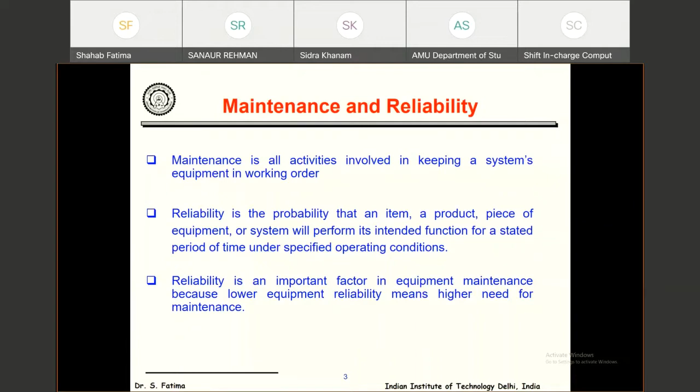because if we want to increase the reliability of any component or machinery, we have to perform some maintenance tasks, and we have to decide when to do those maintenance tasks. So by doing those things, we are able to increase the reliability of machinery and maintain it for a longer period of time. So reliability is an important parameter in equipment maintenance.

So before I proceed, I just want to discuss the basic terms used in reliability. One is failure. What is failure? Failure is basically an event when an item is not able to perform its intended function. Failure rate is the number of failures per unit of gross operating period, time, event, or cycle. And what is mean time between failure?

Because we are trying to maintain the system, and here we are talking about the reliability or availability of mechanical components, those that are repairable in nature. For that, mean time between failure is calculated. Basically, mean time between failure is the average time between failure occurrences: the number of items and their operating time divided by the total number of failures. Mean time between failure is basically for the repairable item.

Mean time to failure is actually used for repairable as well as non-repairable items. Non-repairable items means electrical and electronic components which cannot be repaired. So for those components, we calculate the mean time to failure, the average time to failure occurrence.

Next is mean time to repair. So here we calculate how much time is required to repair or restore the item to a specified condition. That is known as mean time to repair. Repairability, maintainability, availability, these are terms which are used very frequently and people basically get confused by

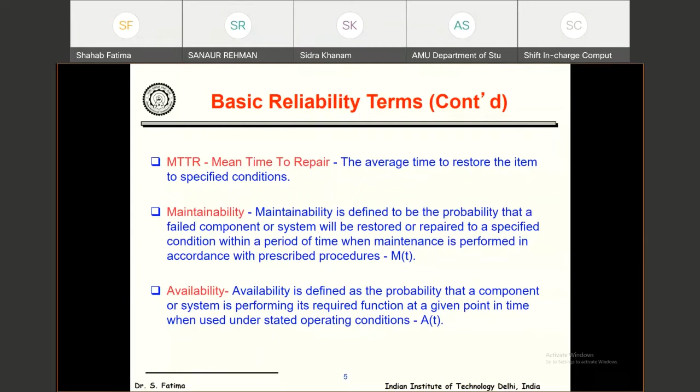Now we are discussing the types of failure. In a mechanical component, what could be the type of failure? There are two most common types. One is sudden failure, which is due to some stress that exceeds the strength of the product, equipment or machinery. The next is degradation failure, that is, gradual wear out. Degradation indicators include crack growth, change of resistance, corrosion, and aging.

In a sudden failure, we can't do anything with maintenance, because that is a sudden act of God, or there are other factors. Sometimes the current increases, or there are many other factors associated with sudden failure. So we don't have any control over sudden failure, but most components encounter degradation failure. Degradation failure is the ideal condition for any type of maintenance, including condition-based maintenance. Other failures may also occur in the system because of human error.

Reliability is basically the life-to-death phenomenon of any component. Each component has to face three different phases: burn-in phase, useful life, and wear out. The burn-in phase has a decreasing failure rate, where the possible causes of failure are manufacturing defects, welding, soldering, assembly defects, errors in the part, or poor workmanship.

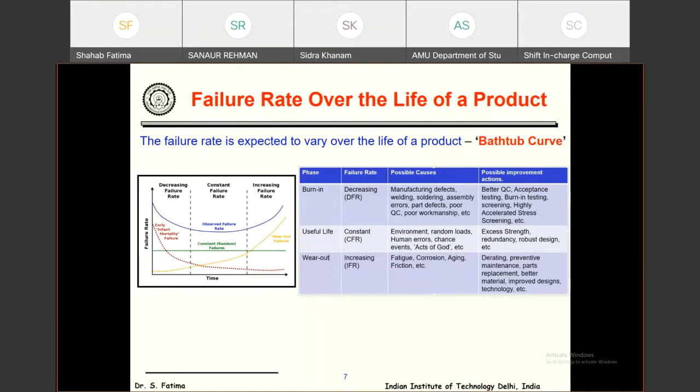If you look at the bathtub curve, the failure rate of mechanical systems starts increasing from the beginning, whereas it is constant in electrical and electronic systems. So, degradation, failure, and maintenance. What is machine availability? Machine availability is basically uptime divided by total time, that is, uptime plus downtime.

So now, what is the major problem? What we are facing in the useful life is unexpected breakdown. If we talk about any plant, or any machinery or any product having a mechanical component, we are facing unexpected breakdown.

So here, if you have a plant like this, a sewage treatment plant, there are so many units: it has a preliminary treatment plant, primary treatment, membrane, end product. So this is a total plant. And if you talk about a big machinery, you can look into the surface miner. There we can see there are a number of components.

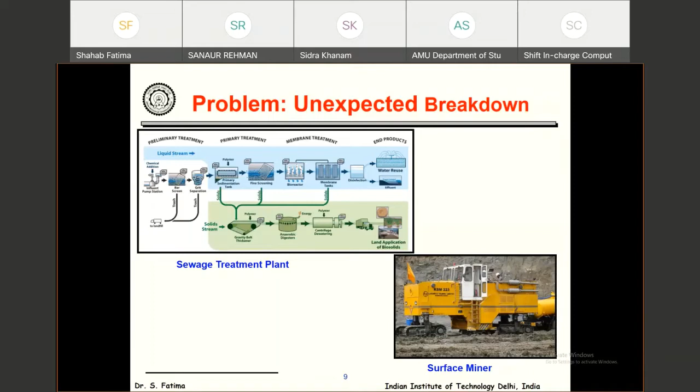So if we face any kind of unexpected breakdown, how to maintain that system? Or is there any other way to figure out the maintenance before it actually happens? So here, the major problem is unexpected breakdown. So by doing the maintenance, how can we reduce the effect of the breakdown, or how can we minimize the effect of breakdown?

Looking into the definition of maintenance, maintenance is basically the combination of all technical and administrative actions, including supervision actions, intended to retain an item or restore it to a state at which it can perform a required function. This is the standard definition of maintenance. Maintenance is basically a set of organized activities that are carried out in order to keep an item in its best operational condition with minimum cost.

See, every time we talk about maintenance, we will also look into the cost of maintenance. The cost of maintenance cannot exceed the cost of the product. So every time we have to look into the cost of maintenance also.

If you look into the history of maintenance, maintenance started in the 1940s, or you can say the first generation of maintenance. At that time, once the system fails, we try to fix it when it broke, a run-to-failure kind of strategy, or you can say breakdown maintenance is what people were doing.

In the second generation of maintenance, people were trying to schedule the maintenance activity, or schedule the monitoring of the system, or you can say scheduling the overhaul, or doing some cycle-based activities for maintenance. So here people are performing preventive maintenance.

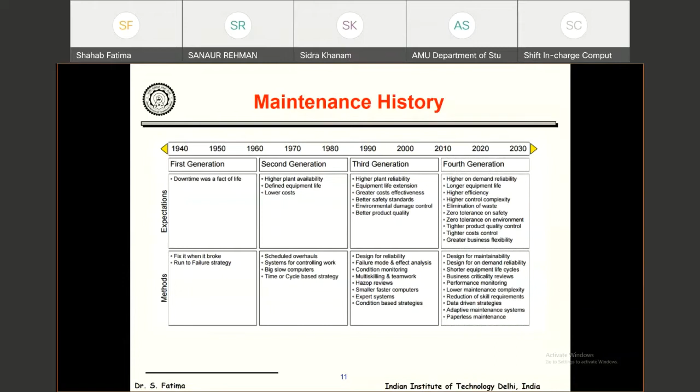So what are the basic objectives? We all know the basic objectives are maximizing production, minimizing energy usage, optimizing the useful life, looking into the budget, optimizing the maintenance activity, optimizing resource utilization. And by doing those, what we achieve is reduced breakdown, reduced downtime, improved equipment efficiency, improved inventory control, and cost reduction. So we are all aware of the maintenance objectives.

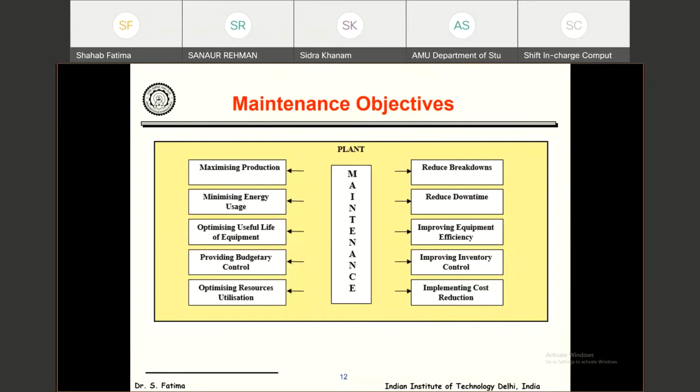Now, as I told you, we have four different types of maintenance philosophies. One is breakdown maintenance, also known as reactive maintenance. We wait for the system to fail. Once the system fails, we fix it. Next is preventive maintenance, known as periodic maintenance because it is based on some period of time, schedule, calendar, runtime or number of events. So that is known as preventive maintenance.

The third one is predictive maintenance, that is, condition-based maintenance. By mounting some sensors on the machine, we are trying to predict the condition of the machinery. The fourth one is proactive maintenance. This is the fourth generation, where we are trying to identify and design out the root causes of failure.

So I'm going to discuss one by one in detail. Breakdown maintenance implies that repairs are made after the equipment has failed and cannot perform its normal function anymore. Nowadays people also use breakdown maintenance because it is quite justified in small scale industry where the systems are not critical.

So systems are basically divided into 3 categories. One is the critical component, without which things will not perform. Next is essential. Essential is also very important, but here we can perform the actual production without it. The third one is general purpose equipment. For general purpose things, breakdown maintenance is quite justified. For essential equipment, we are looking for preventive maintenance as well as breakdown maintenance.

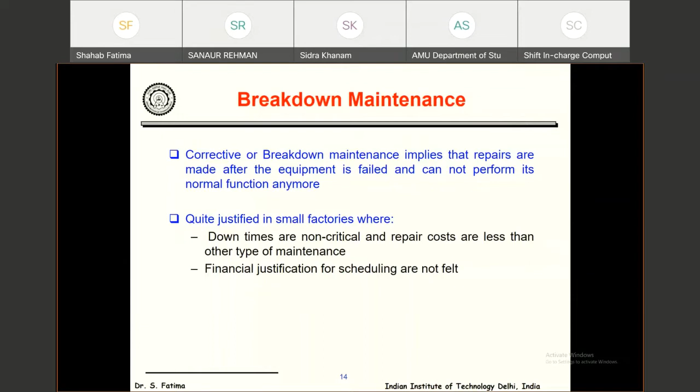So next is preventive maintenance. It is a set of activities that are performed on plant equipment, machinery, and systems before the occurrence of failure in order to protect them and prevent or eliminate any degradation in operating condition. So it is good for machines and facilities whose failure would cause serious production loss, because preventive maintenance is also associated with cost. Every time you are performing some task to maintain the system.

If you talk about an automobile, every 6 months or a number of kilometers, you have to perform your preventive maintenance. You have to change the filter, you have to change the oil. Sometimes it is quite justified, but sometimes your oil condition is good, and still, because the OEM has told you to change your oil after a certain period of time, you are changing your oil without looking into the oil condition. So in that case, you are actually wasting money, correct? Your oil is as good as it was, but you are changing it because as per your OEM you have to change it after 6 months. So that is counted as a loss in maintenance.

So it is good for those machines. But if you talk about defense or army activities where you have to use a missile or a tank, in that kind of machinery the critical thing is the person who is going to operate it. During war, you are not looking at the money side, you are looking at the working of the equipment. Or if we talk about an aircraft, people perform a number of preventive maintenance activities, and that is quite justified, because if the engine is not working, your aircraft will crash. The critical thing is the life of the people in the aircraft. So under some conditions, preventive maintenance is quite justified.

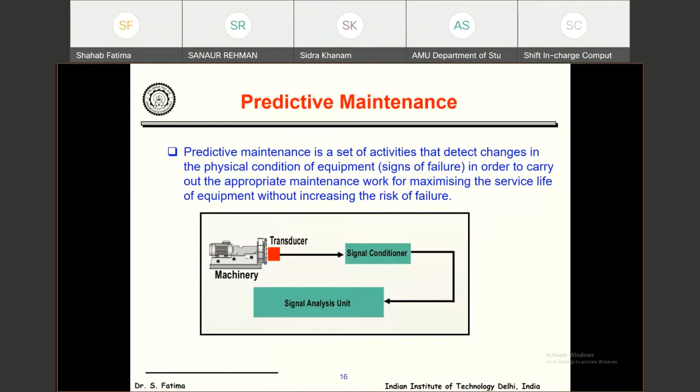So if you talk about the techniques of predictive maintenance, there are different techniques: vibration, wear debris analysis, where we monitor the oil condition or the debris, oil, temperature, electric current, process parameters. What are the benefits of predictive maintenance? There are a number of benefits of doing predictive maintenance.

Lower maintenance cost. Equipment cost is quite high in doing predictive maintenance, but if you look over a longer span of time, predictive maintenance actually means lower maintenance cost. Fewer machine failures, because you are continuously monitoring the machine. So before the failure occurs, you can change it or repair it, or you can plan your maintenance activities.

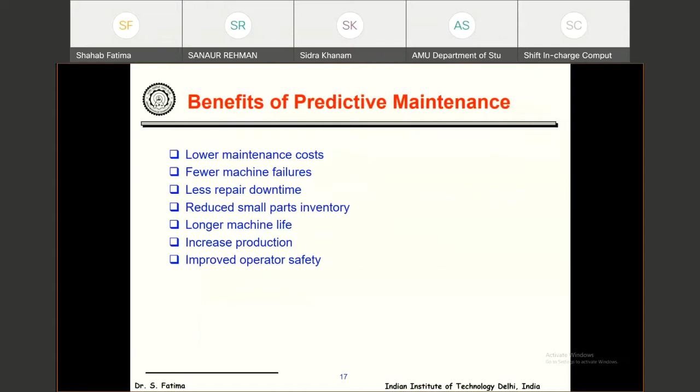Less repair downtime, reduced small part inventory, because you know that this system will fail after so many hours of operation. So beforehand, you can order the inventory. You don't have to keep the inventory in an idle state. Longer machine life, increased production, and improved operator safety also.

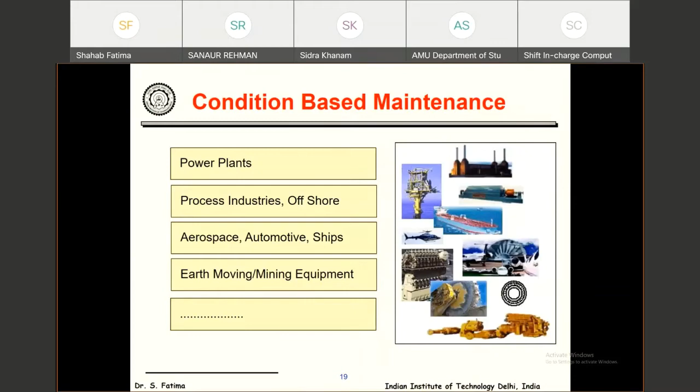Condition-based maintenance is applicable in a very wide range: power plant, process industries, offshore, aerospace, automotive, ship, earth moving, mining equipment. So I'm going to discuss different types of machinery condition monitoring techniques.

First is vibration-based monitoring. In industry, 70% of machinery condition monitoring is carried out by vibration analysis. Here we mount the transducers at different locations, monitor the vibration, and based on the signal acquired from that transducer, we find the characteristic frequency, and based on those characteristic frequencies, we are able to say what kind of fault is there in the system.

The second important technique is wear debris analysis. This is not an in situ kind of measurement. Here we send the oil sample to the respective lab and tell the person to perform this type of test on the oil sample, and by doing that he is able to tell us the composition, what impurities are there in the oil, and based on those particles or impurities we are able to tell what failures are in the parent material.

Other important techniques, used 10% in industry, are thermography, ultrasonic, and motor current signature analysis. So I'm going to discuss all the different types of condition monitoring techniques. Vibration monitoring is a key predictive maintenance technique. It is used to determine the operating and mechanical condition of equipment.

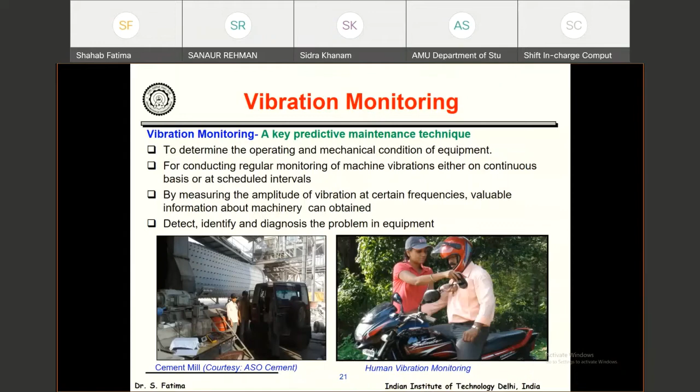So in the later stage, we can tell the OEM that the body is introduced with so many amplitudes of vibration, so we can reduce those amplitudes by improving the design of the shock absorbers. So here we are performing human body vibration analysis. So vibration can be used for design stage also.

Now come to the fundamentals of signal analysis. Suppose we mount a transducer on the system, or an accelerometer on the rotating machine, maybe on the bearing side or the gear side. So what do we do after that? We acquire the signal. The instantaneous signal is measured by the sensor as a transducer, and the analyzer processes the signal to give frequency and time domain. So first we acquire the time domain signal.

Suppose I ask you how you are going to analyze those time domain signals, because that is on the time scale and we have an amplitude. So we can extract some features from that time domain signal. If you have an array of signals, what can we acquire? We can acquire RMS, skewness, kurtosis, crest factor. These are the statistical features which we can take out from the signal.

So looking into the time domain features, are we able to figure out what different kinds of faults are there in the machine? Because sometimes looking into that time domain feature is very confusing. We are not able to come to any conclusion by looking into the time domain features. So for that reason, we have to convert those time domain features into frequency domain features by using the FFT technique, fast Fourier transform technique.

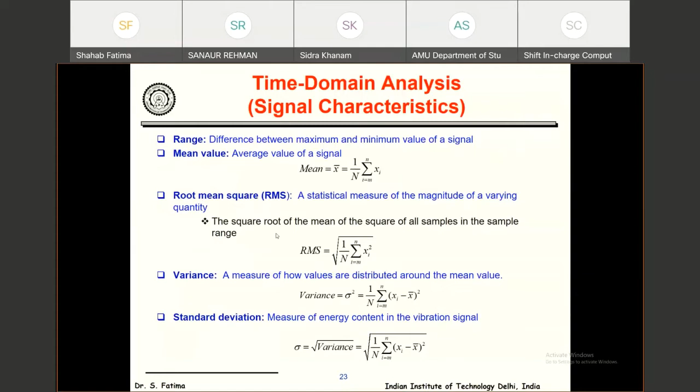So the frequency domain shows frequency versus amplitude value. The DFT and FFT are the techniques used to convert the signal from time domain to frequency domain. So once we have a frequency domain signal - these are the time domain signal characteristics. What we can get is range, mean value, root mean square - these are all statistical parameters you all know. Variance, standard deviation, skewness, kurtosis, crest factor - these are all statistical parameters. I'm sure in your 10th or 12th you have done this kind of exercise.

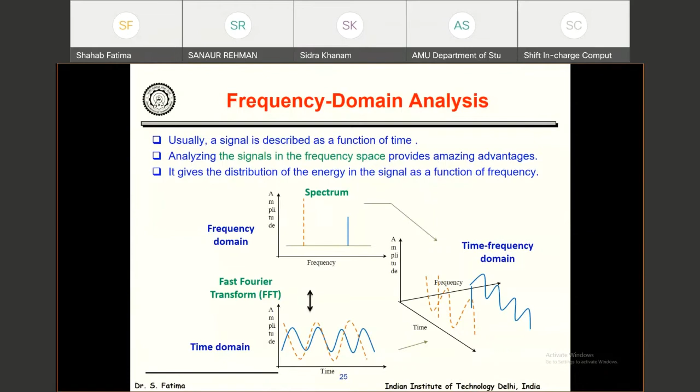So with time domain, we are not able to find out what kind of fault is there in the system, whether it is because of misalignment, unbalance, bearing, or gearbox. So for that reason, we have to convert that time domain feature into frequency domain by performing FFT. Usually the signal is described as a function of time. Analyzing the signal in the frequency space provides amazing advantage because it converts the signal into frequency domain, and by looking into the frequency domain and its characteristic frequency, we are able to detect the fault.

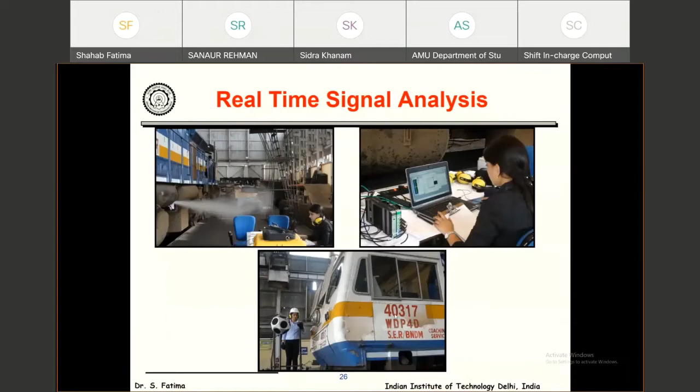So how do we do this real time measurement? By mounting the accelerometer on the product. So here I am monitoring railway engine vibration by mounting the accelerometer on the floor, and we are acquiring the signal. Here we are acquiring 4 signals - we have mounted 4 accelerometers on the surface, and we are acquiring the data and doing real-time monitoring of the signal.

Next important topic - I'm just giving you a glimpse of all the techniques. I'm not going into detail because I'm sure in the previous lecture you have gone through bearing health monitoring, and later you are also going to look into gearbox health monitoring in detail. So I'm sure that lecture covered it. I'm just giving you a glimpse of all the techniques.

So the next important technique is wear debris analysis. What is wear debris analysis? When two mating surfaces rub against each other, it produces friction. So for reducing that friction, we introduce some sort of lubricant. Even with aging, some particles start coming out from the surface and get deposited into the oil or lubricant. So the contaminant which comes out is known as contaminant analysis. How can we do this contaminant analysis or wear debris analysis?

We can perform different kinds of tests. First is the particle count test. Here we look into a certain number of particles and say this is the particle count, parts per million is that much. And based on that, we are able to say, we are able to look into the severity of the defect.

We are able to look into the composition of the wear. We are also looking into the morphology as well.

Next is ferrography, because most rotating components have maximum contribution from the ferrous side. Here we do the ferrography, where we collect the data on the magnetic strip and find out the intensity of the failure.

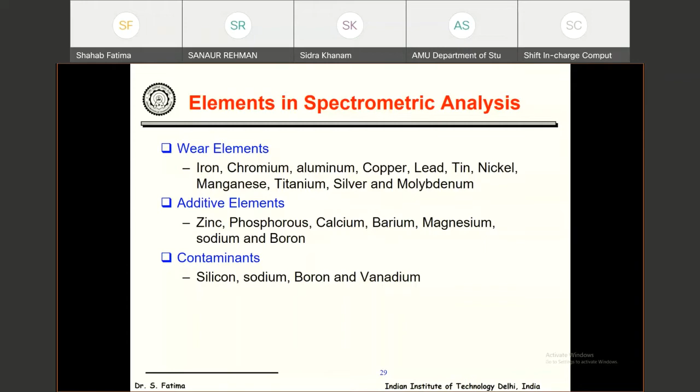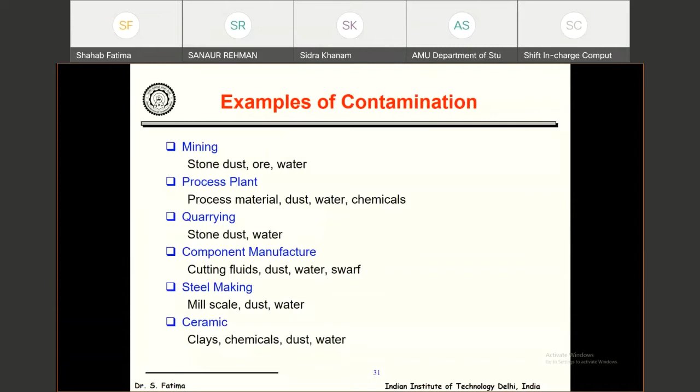Next is examples of contamination. If it is a mining industry, the maximum contamination is from stone, dust, or water. If it is a process plant, the contamination could be process material, dust, water, or chemical. If it is a quarrying industry, stone and dust; component manufacturing industry, cutting fluid, dust, water. If it is steel making, mill scale, dust, water. If it is ceramic, clay, chemical, dust. These are examples of contamination.

An effective oil analysis program should have an established objective and an oil analysis schedule. In this, handle the oil sample very correctly.

Oil analysis is actually similar to blood collection. In a human body, we take out a blood sample and tell the person to perform this kind of test, whether we want to know hemoglobin levels, or perform a COVID test or some other test. You have to tell the person, the pathology person who came to collect our sample, to handle the bottle very carefully.

He can take out the blood from a very clean or new syringe. In a similar way, in handling the oil sample, we have to take proper care and ensure proper communication with the analysis lab. Similarly, like in our blood sample, we tell the person to perform this kind of test, we look into the result, and then we perform the extended test. In a similar way, we do it here also.

Understand the different oil analysis trends, put the right oil in the right machine, extend oil drain interval when needed, identify the quantity of contaminant, identify the origin of contaminant, provide feedback to the laboratory, and evaluate the cost effectiveness. These are the major steps to perform for an effective oil analysis program.

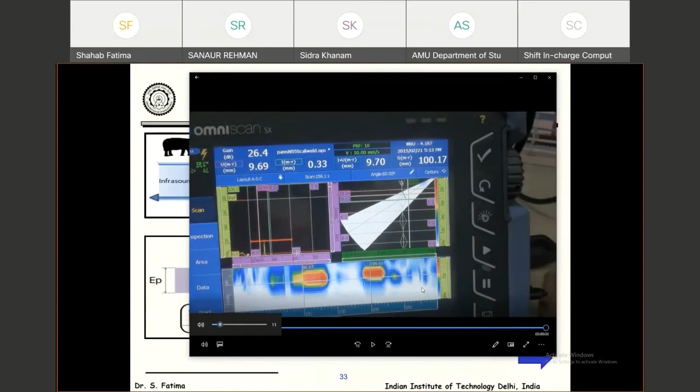This is a very important technique with very specific applications. It is mandated to do ultrasonic testing after performing welding, so we can get to know if there is a crack.

The next important technique is motor current signature analysis. It is similar to vibration based analysis. It is an online/offline analysis technique which includes instantaneous current measurement, similar to how we do vibration monitoring, we do current monitoring.

Why is it required? Because in some applications, we are not able to mount the transducers. In those applications, what we do is take out the current signature, and based on that signature, we are able to tell what kind of fault is there in the system. Here, in terms of transducer, the Hall effect sensor is used, along with an analyzer for analysis.

Motor current signature analysis can be used in situations where an accelerometer cannot be mounted, such as a submersible pump, because it is below the ground, and we are not able to mount an accelerometer on the surface, or perform an ultrasonic test, or perform oil monitoring. So in that condition, how are we going to monitor the condition of the submersible pump? This is the technique used to monitor its condition.

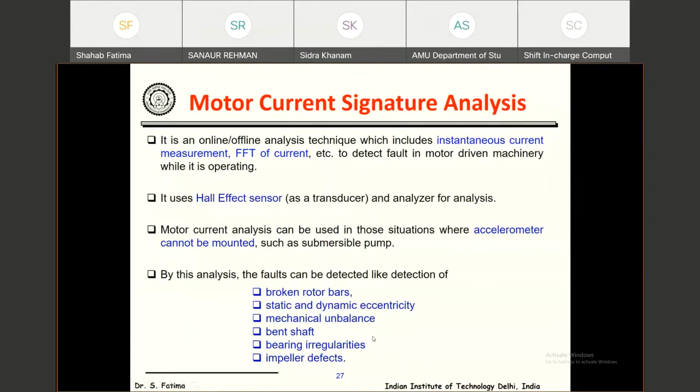By this analysis, faults can be detected, like broken rotor bar in a pump, static and dynamic eccentricity, mechanical unbalance, bent shaft, bearing irregularities, and impeller defects. This is the submersible pump, which is actually submerged in water.

Here we mount the Hall effect sensor to acquire the signal at the power cable, and by looking into the current draw, those features tell us whether there is any fault in the system or not.

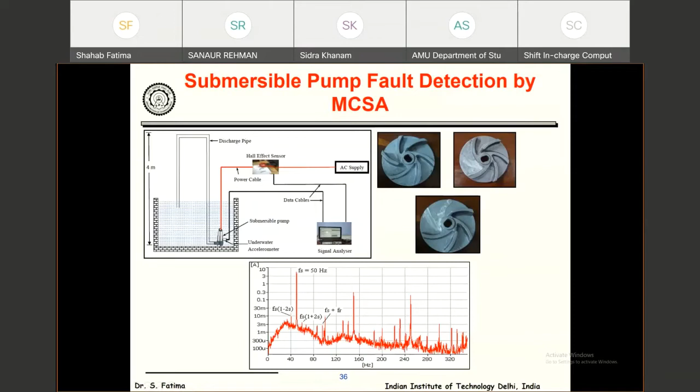Here we actually introduce a defect in the impeller. We remove one vane, then we remove the second vane also, and by looking into the side band of the characteristic frequency, we are able to tell that there is an impeller defect in the submersible pump system.

Now, the fourth important technique is thermography.

Here, we all know that every body emits some sort of thermal radiation. But we cannot see that thermal radiation with the naked eye. So for that, we require some sort of sensor, and that sensor is known as a thermal imaging camera. Why is a thermal imaging camera able to detect that kind of thermal radiation? Because it converts the radiation into heat, or you can say into electromotive force, and by looking into those thermograms, we are able to tell where the fault is.

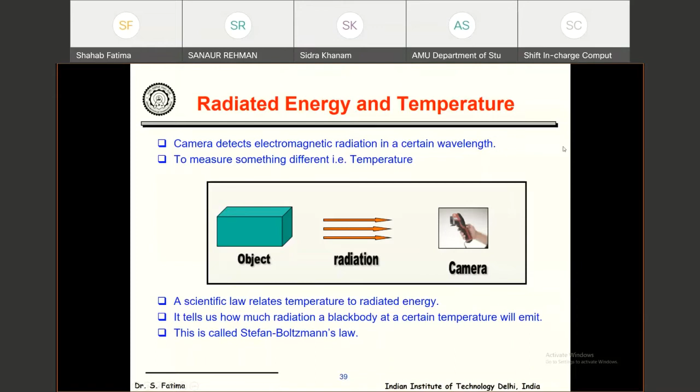Radiated energy and temperature. The camera detects electromagnetic radiation in a certain wavelength. With the camera, we are actually trying to measure the temperature. But how can we measure the temperature? Because a scientific law relates temperature to radiated energy. We are actually trying to detect the radiation; it tells us how much radiation a black body at a certain temperature will emit. The law which converts radiation to temperature is known as the Stefan-Boltzmann law.

Here we introduce one more new term, known as emissivity. It is the ratio of radiation emitted by a real body compared to the radiation emitted by a black body at the same temperature and same wavelength. If you look into the emissivity of different things, thermal and electrical insulators are excellent emitters: wood, rubber, plastic, paper, concrete, painted surfaces, buildings. But metals are poor emitters, unless heavily oxidized. Emissivity is rarely superior to 0.25: copper, steel, iron, brass, nickel, zinc, aluminum, lead, chromium.

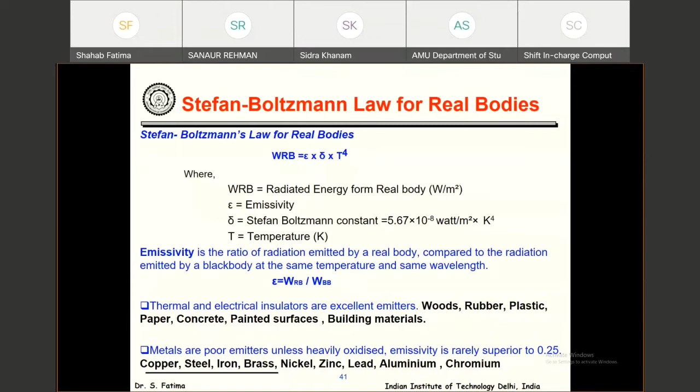So if we want to measure the temperature or take a thermal image of any metallic surface, which is a poor emitter, we have to calibrate the camera. IR cameras are calibrated to a black body, so only black body radiation can be converted to temperature. As in a normal camera, we focus the lens. Here we do it in a similar manner, looking into temperature, relative humidity, focusing, image composition, temperature range.

So how is this thermal imaging camera different from our normal camera? In this camera we have a semiconductor which converts the radiation into temperature using the Stefan-Boltzmann law. Calibration of the camera matters, because putting in the right value of emissivity is important to measure any thermal image. The calibration of the camera can be done in two ways.

One is field calibration. In field calibration, select a known temperature sample and move your measurement function to the sample surface. Measure the temperature with a particular emissivity; because the temperature is known to you, you can change the emissivity accordingly, and note that particular emissivity.

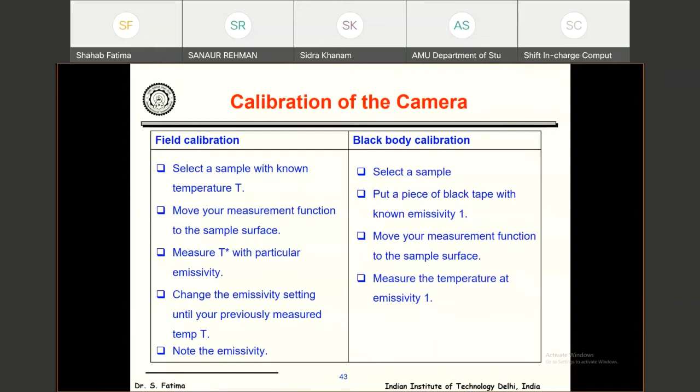There is a very wide and emerging application of thermography. One is electrical: if there is an electrical fault at a distance, you are able to find out that the wire is open or there is a fault inside the wire. In coal mines also, because all the metal is at the surface, by shooting the camera you are able to find out where you can do the mining.

In automobiles, any leakage or crack you are able to detect by the change in the thermal images. In electronics also, if the circuit is open or there is any fault, you are able to detect it by shooting the thermal imaging camera. In mechanical systems, by continuously monitoring the system, you are able to detect what kind of fault. In defense and industrial applications, thermography is very widely used: steel, cement, paper plants.

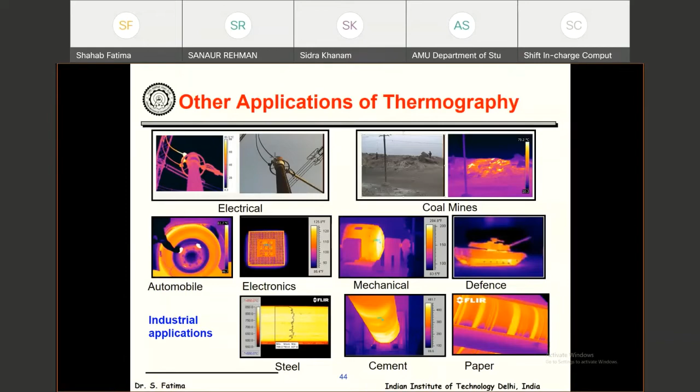Particularly in the research area, I have used this thermal imaging camera where we continuously monitor the system and we get to know the incipient misalignment inside the system by monitoring the thermal image. The rate of the thermal rise is different from the healthy one.

Here also, in this refrigerator case study, we use some sort of material to reduce the noise of the refrigerator. So before putting the material and after putting the material, we do the thermal analysis also, and we get to know that putting the material is not altering any performance of the refrigerator. Now I have discussed all the techniques of predictive maintenance. Now we move into proactive maintenance.

So if you take a simple example, in case of bearing failure, if the bearing fails, what do we do? We can change the bearing. Okay. So that change of the bearing is known as breakdown maintenance. Or if you are doing preventive maintenance, what actually do you do? After a cycle you change a bearing or you lubricate it or you clean it. That is known as preventive maintenance.

Third one is predictive maintenance. You mount an accelerometer on the bearing side, bearing hub, and continuously monitor the condition of the bearing. That is known as predictive maintenance. But here, in all the types of maintenance, we are only talking about maintaining the system, correct? Or maintaining the bearing. We never talk about why the bearing failed. What are the reasons of bearing failure? Why is the life of the bearing so many hours only?

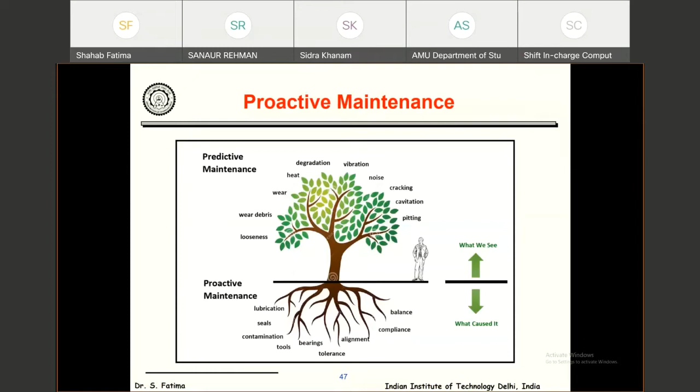Can we improve the life of the bearing? How can we improve the life of the bearing? So those questions can only be answered by doing proactive maintenance. Here, we are actually looking into the cause of the failure. If we get to know what the causes are, we are also looking into the mitigation of those causes. So that is actually the fourth generation of maintenance, where not only are we performing the maintenance, we are simultaneously eliminating the causes of failure also.

Proactive maintenance is different from the other three maintenance modes because it addresses a much more systematic element of a maintenance program rather than examining the machine itself. So it actually focuses on determining the root cause of machine failure and dealing with those issues before failure occurs. Because in the other three types of maintenance, we are actually waiting for the failure to occur. But in this, we are finding the root cause before it actually happens.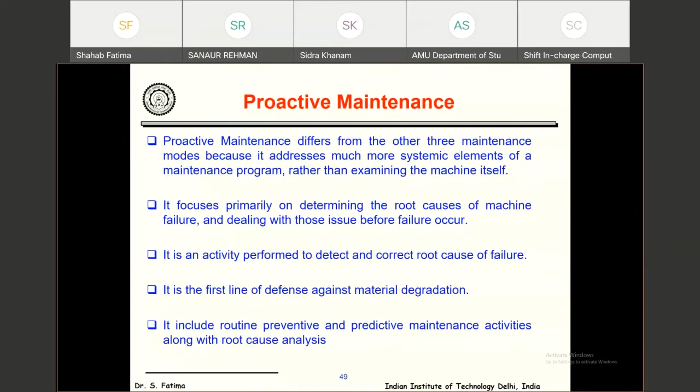So it is an activity performed to detect and correct the root cause of failure. It is the first line of defense against material degradation. It includes routine, preventive, and predictive maintenance activities. So these are the basic methods employed by proactive maintenance to extend item or equipment life.

If it is made up of plastic, the life of the bearing made up of plastic is so many years. If the bearing is made up of metal, the life of the bearing is different. So in a similar way, by redesigning or changing the material composition, we can also increase the life of the product.

Age exploration: it also provides a mechanism to find out the age of the system. What is the age of the bearing? Rebuild certification verification: at the installation of new or rebuilt equipment, it is essential to verify, because during maintenance the maximum failures occur during installation or assembly of the system. So that also should be verified.

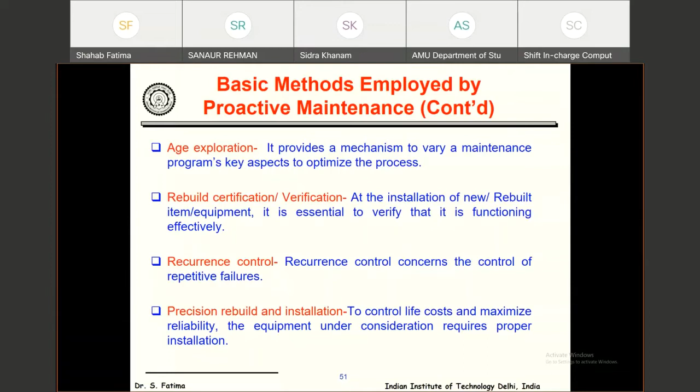So till now, I have introduced you to different types of maintenance. So if I ask you how you are going to perform the maintenance of any cement plant or any machinery or any industrial system, how are you going to do it? You know all the types of maintenance, you know all the techniques. Are you just picking out any technique and performing it, or should there be a systematic way? That systematic way is known as reliability centered maintenance.

Because any industrial system is made up of different components and equipment which are characterized by different failure mechanisms. For a simple example, take the human body. Suppose you know all the types of operations, surgery, and all the medicines. Suppose we have a kid whose age is 3 years, a pregnant woman, a very old person, or a normal body. Can we prescribe the same medicine to all four of them? No. Because every time, the doctor looks into the body condition and then prescribes the medicine.

So first of all, the doctor asks you what your body condition is, if you have any kind of illness or problem, then he tells you this is the medicine you should take. So in a similar way, all industrial systems are made up of different components, with different failure mechanisms and different reliability. If someone is 70 or someone is 3 years old, the reliability of both bodies is different.

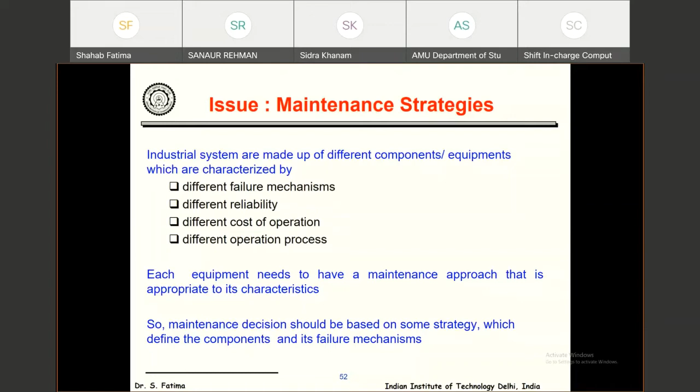Every time we are actually making mistakes in selecting the maintenance strategy, because first you have to analyze the system, and then as a maintenance engineer, come up with a strategy for which maintenance to perform on this kind of system. You know all the types of maintenance, but where to perform them is very important, looking into the cost and all the aspects. So each equipment needs a maintenance approach appropriate to its characteristics, and maintenance decisions should be based on a strategy which defines the component and its failure mechanism.

When selecting the type of maintenance, several often conflicting attributes must be taken into account: mean time to failure, mean time between failures, mean time to repair, failure cost, budgetary constraints, safety and environmental issues, availability of spare parts, and operator skills. So how can we solve this kind of issue? This can only be solved by performing reliability centered maintenance.

First of all, I must tell you, reliability centered maintenance is not a type of maintenance. It is basically a process of determining the most effective maintenance approach. It employs all the maintenance techniques in an integrated manner.

Look, by performing reliability centered maintenance, we can tell that for this type of system you can perform only one type of maintenance, or you can take an integrated approach of combining two different types of maintenance. So it is actually the umbrella under which all the maintenance comes. It is a process, not a technique, of determining the most effective maintenance approach. A rigorous RCM analysis is based on detailed FMEA and includes probability of failure and system reliability calculation.

So FMEA is failure mode effect analysis. It is actually based on analyzing the failure. And once you analyze the mode of failure, you get to know what are the reasons of failure, causes of failure. Once you know the causes of failure, you can tell that this kind of maintenance is suitable. Okay.

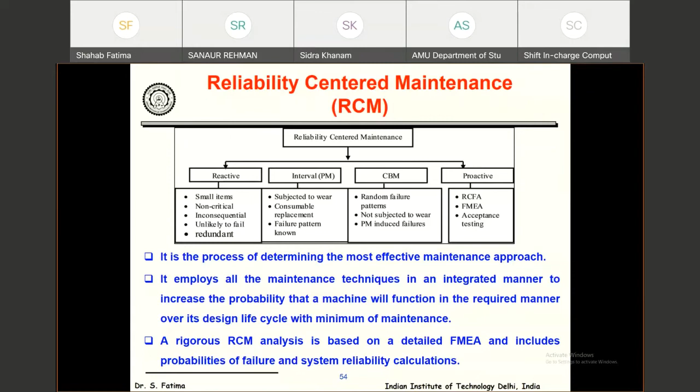Suppose you have an industry where you have thousands of pumps. So you cannot perform predictive maintenance on those thousands of pumps. For that, if you perform a failure mode effect analysis, fault tree analysis, you get to know that the culprit, one out of 1,000, is 1 or 2 pumps. So there is no need to perform the maintenance on all.

So reliability centered maintenance actually gives us an answer whether we are going to perform the maintenance of the whole industry or whole plant, or whether to find out the culprit who is actually faulty, who is the reason of the breakdown. Once you know the reasons of the breakdown, then only perform the maintenance on that particular component, not on the whole plant.

The questions considered by RCM analysis are: what does the system or equipment do? What is its function? What functional failures are likely to occur? What are the likely consequences of this functional failure? What can be done to reduce the probability of failure? So here the answer comes in terms of the RCM logic tree.

So by performing that logic tree, we get to know: will failure of the facility or equipment have a direct adverse effect on safety? If yes, then definitely perform predictive maintenance. If it is not, then perform preventive maintenance. If the cost of performing preventive maintenance is justified, then fine, do preventive maintenance. If cost is not justified, then perform breakdown maintenance. So it comes like this: first you have to look into proactive maintenance, then predictive maintenance, preventive maintenance, and breakdown maintenance.

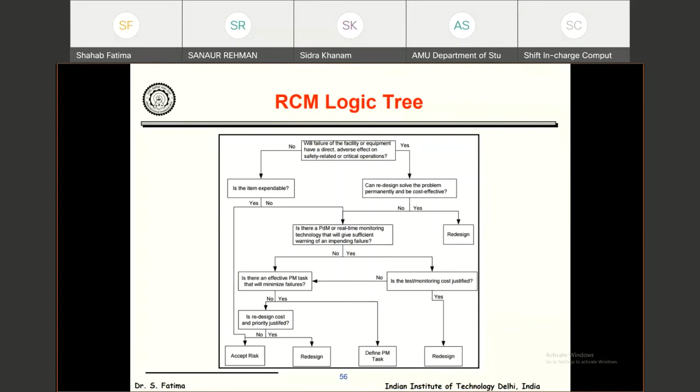So the RCM process is composed of the following steps. First is identify important items with respect to maintenance. As I told you, if you want to maintain a cement plant or paper plant or automobile plant, first break down your whole plant into different groups, and then find out the important items with respect to the maintenance.

Obtain appropriate failure data. Looking into the history of failure, you can also get a clue what is most likely to fail. Develop fault tree analysis, find out the probability of occurrence of failure, apply the decision logic tree to critical failure modes, classify maintenance required. Because after you perform a fault tree analysis or FMEA, you get to know that in a plant you perform maintenance on 1 or 2 pumps, and you are able to achieve the reliability, or increase the life of the system. Implement RCM decisions, reevaluate.

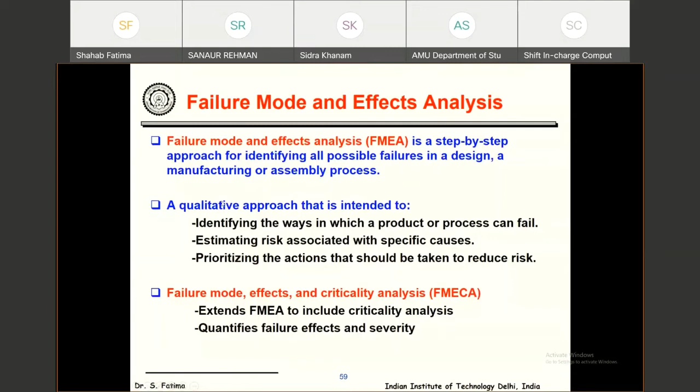So failure mode and effect analysis. Failure mode and effect analysis is a step-by-step approach for identifying all possible failures in a design, a manufacturing or assembly process. It is a qualitative as well as quantitative approach. If it extends to quantitative, then a criticality analysis is required. Otherwise, it is a qualitative approach. Here we find out the risk priority number. This is the typical FMEA sheet.

Here we find out the function of the equipment, what are the potential failure modes, what are those effects, and we rank in terms of severity from 1 to 10. 10 means severe, 1 means less severe. Same for the causes of the failure, how frequently it occurs; we also rank the occurrence from 1 to 10. Next is current process control. Are we able to detect the failure easily, or are we not able to detect the failure? Then we can also rank the detection.

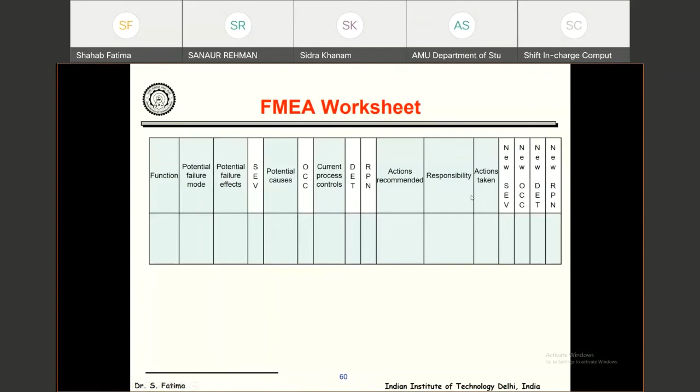Multiplication of all three, severity, occurrence, detection, is the risk priority number. Then we can find out the action, what action we can take to reduce the risk priority number. Who is going to perform that action? When the action is taken, then again you calculate the new RPN: occurrence, detection and severity.

So severity, occurrence and detection are a qualitative measure to control the worst potential consequences resulting from the function of failure. 1 is not severe, 10 is very severe. Same for occurrence: 1 is not likely to occur, 10 is very likely to occur. Detection means able to control or detect and prevent failure, easy to detect or not to detect. Again, you have to calculate the RPN from severity, occurrence and detection, and find out the risk priority number.

Criticality analysis. Criticality analysis is based on the standard 1629A, where we know the failure rate of some part; the failure rate data is available to calculate the criticality number. So based on that, by using that particular equation, we can also calculate the criticality of the system.

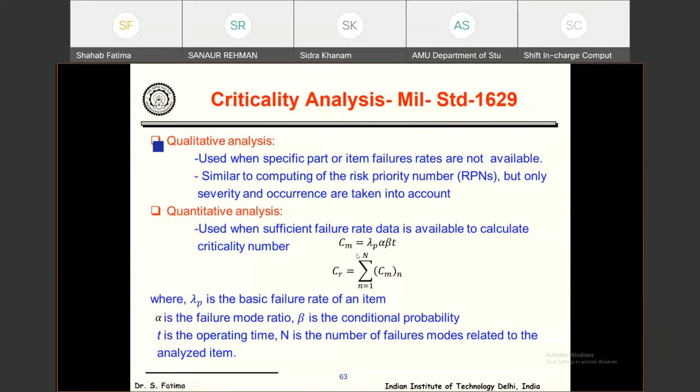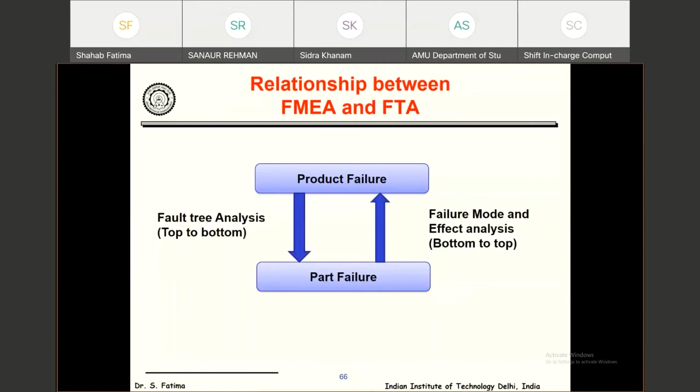So the next important technique is fault tree analysis. The difference is fault tree analysis is a top to bottom approach and failure mode is a bottom to top approach. Something gets failed and you are actually finding out the causes of failure. Here, in the top to bottom approach, something is not working and you are investigating those conditions, why it is not working.

So identify the critical events and combinations that lead to the top event, and your top event is actually that the system is not working. Here also we perform two types of analysis: qualitative analysis and quantitative analysis. Qualitative analysis is finding out the smallest possible combination of occurrence of failure events. Quantitative analysis is calculating the probability of that top event. The calculation is based on Boolean logic. You all know the OR gate is the union of events, and the AND gate is the intersection of events.

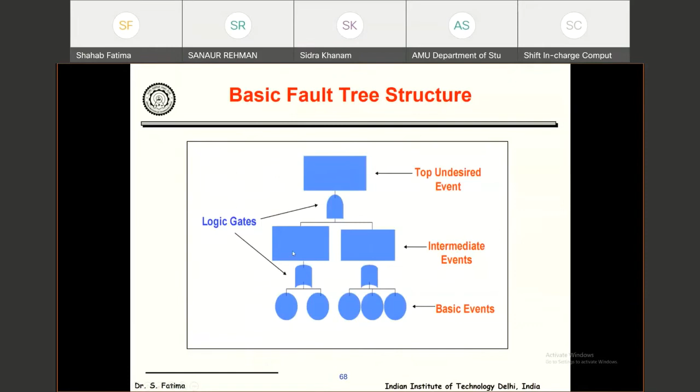So here, this is the basic structure of the fault tree. The top one is the top undesired event. Something not working is known as an undesired event. And we have intermediate events, that the system is not working because of some reasons. So if we take an example of electric motor failed to operate, the reason can be a defect in the motor or no current to the motor.

Now come to the reliability estimation. In reliability, we have two types of data: field data and life data. If the field data we collect is not very long, then we can evaluate it by doing a non-parametric analysis. If the data is sufficient, then we can try to fit the data into a distribution and calculate the parameters.

So the non-parametric method analyzes failure data without assuming any particular distribution. Non-parametric methods are simpler and easier to apply. The disadvantage is that sometimes extrapolation or prediction of reliability outside the data range is not possible. The methods for conducting non-parametric analysis are Kaplan-Meier estimation, the simple actuarial method, and the standard actuarial method.

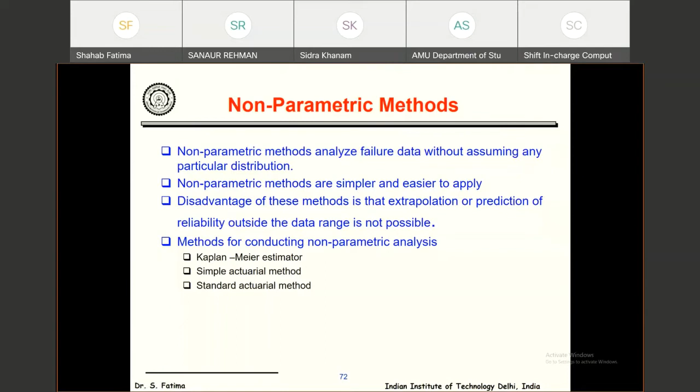So basically what I mean to say is there are two ways to calculate the reliability. One is by not assuming any particular distribution, and the second is by assuming a particular distribution. So these are the ways to estimate. I'm not going into the detail.

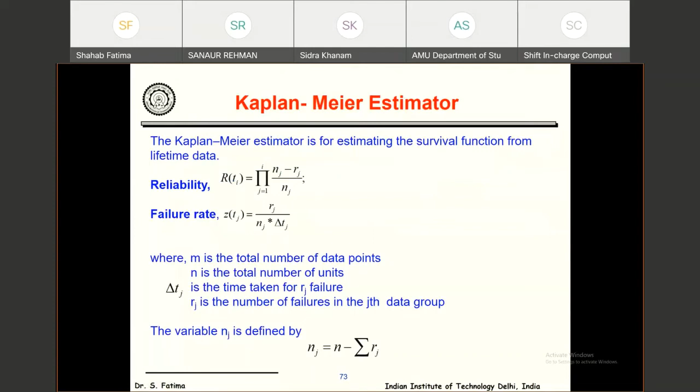I'm just skipping that part because of time, I just want to cover a few more important things. So second is the parametric method.

First we try to fit the data into normal distribution, exponential distribution, Weibull distribution, or lognormal distribution. Before fitting it into the distribution, we have to perform a goodness of fit test to find out whether the data fits into that particular distribution or not.

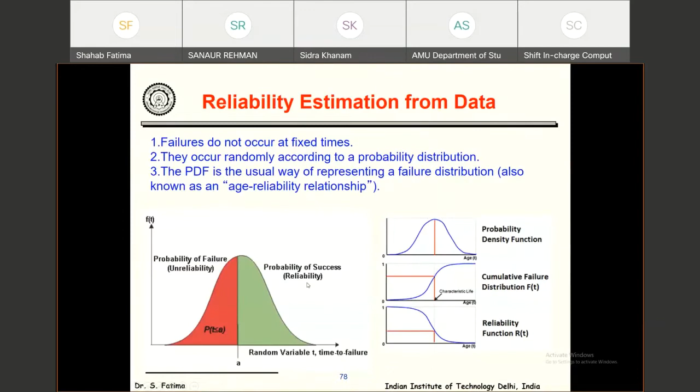The probability of failure is known as the unreliability of the system, calculated by the cumulative distribution function. The probability of success is known as the reliability. By performing this activity, we are able to calculate the reliability of the system.

First we put in the failure data and try to fit it into different distributions. Once you fit it, you use that particular equation to calculate the reliability. So this is the time to failure distribution, and how we calculate reliability, hazard rate, and mean time to failure.

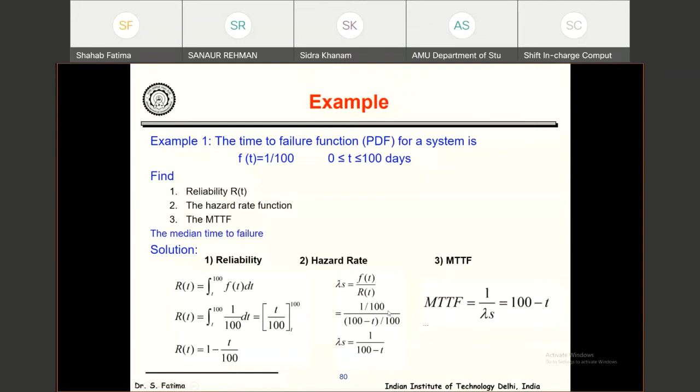Now, the idea of discussing failure mode effect analysis and fault tree analysis is this: we are actually trying to enhance the availability of a sewage treatment plant. As I showed you in my initial slide, we performed a case study on this. So how do we do that?

A sewage treatment plant has different sections: an inlet section, physical treatment, and other sections. So the idea is to divide the whole plant.

In a plant we don't know where to start, because there are so many maintenance techniques already being performed. So how do we proceed? This is a case study done by one of my master's students.

He was sponsored by L&T. What he did is divide the whole plant into different sections and acquire some data.

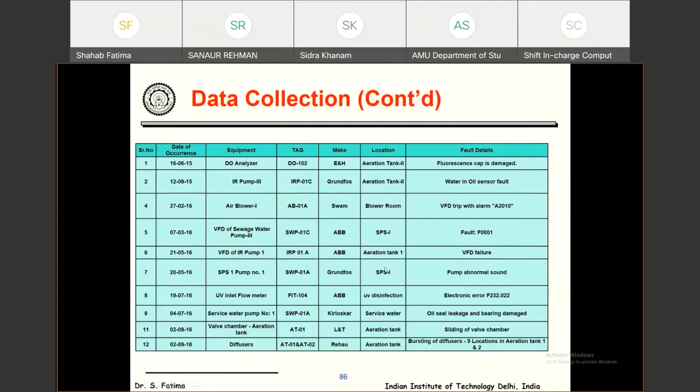He acquired failure data for three years, from 2015 to 2018, and got to know the fault details. He acquired all the location and fault detail information, then developed the FMEA sheet based on that, and found out the severity and the highest risk associated item.

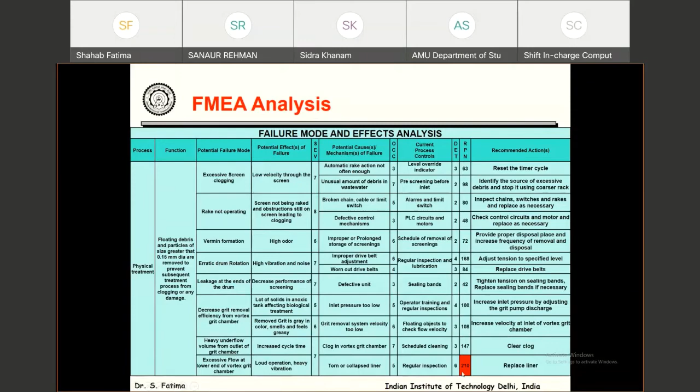Once he knows the highest risk, or highest RPN, is in this particular section of the plant, then we have to find the strategy for only that particular section. We don't have to perform maintenance activities for the whole sewage or wastewater treatment plant.

We divide the whole plant into different sections, and by doing that we find out where the severity is concentrated in a particular section. Then we perform maintenance on that particular section. This is the outcome of the FMEA study we carried out on that plant.

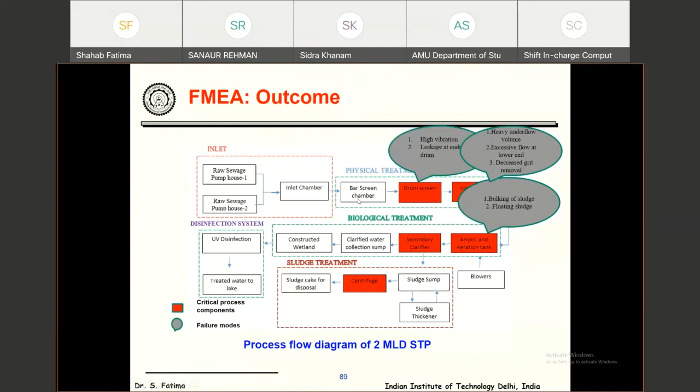So the sections are: inlet, physical treatment, biological treatment, disinfection system, and sludge system. He performed FMEA and FTA and found that the physical treatment plant is divided into 3 different sections. The red one shows the critical process components, and these are the failure modes.

He performed FT analysis again and confirmed these are the only critical processes involved in the whole plant, so we don't have to perform maintenance on everything. Maintenance is associated with cost, so you don't maintain the whole plant—you find the risk-associated region and perform maintenance activities only there. These are the root causes of that particular critical process.

We developed maintenance strategies targeted at those critical items only.

The next case study is failure and performance analysis of a surface miner. I showed you the surface miner in the beginning.

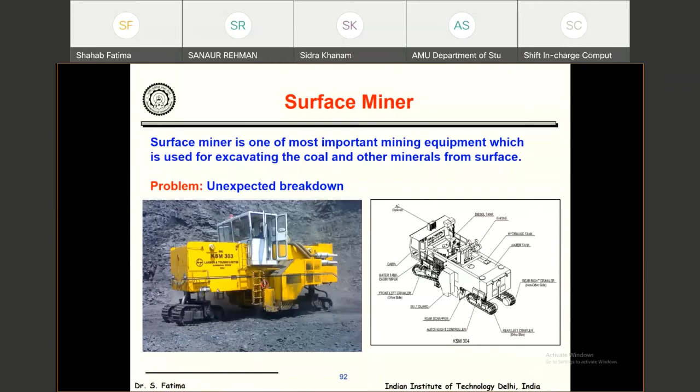Surface miner is also one of the important mining equipment which is used for excavating coal and other minerals from surface. This case study was performed by one of my L&T students on a Coal India site where this surface miner is facing unexpected breakdown. As a maintenance engineer, our first thought is: why is production rate less because of unexpected breakdown? We thought something happened to the machine, so we performed failure mode effect analysis, FMEA, finding out the root causes of the failure.

Looking into the performance analysis, the overall equipment effectiveness is only 35%. The required value is 45 to 60%, but the average value is only 20 to 30% per month. We wanted to know why it is not performing its intended function. So we did FMEA, FTA, performance analysis, found out the operational availability, utilization factor, production index or efficiency, and found the overall equipment effectiveness, and we got to know that the actual value is actually below.

Why is it below? The reason could be that the actual reason is not a maintenance issue. The actual reason is something different.

The production loss, 44% in percentage, is because of hardness of soil and coal, surface leveling condition, water logging due to groundwater, the machine getting weakened with age due to fatigue, and night shift machine running with maximum safety.

38% loss is because of administration issues: operators not available due to change in shift, no fuel available, labor union strike, improper leveling, no approach to reach the machine due to ground conditions, lunch or tiffin break, and non-availability of proper infrastructure like road.

So we are actually contributing to technical loss only, and the technical loss is only 10%, due to poor maintenance, lack of proper inspection during maintenance, poor quality, and unavailability.

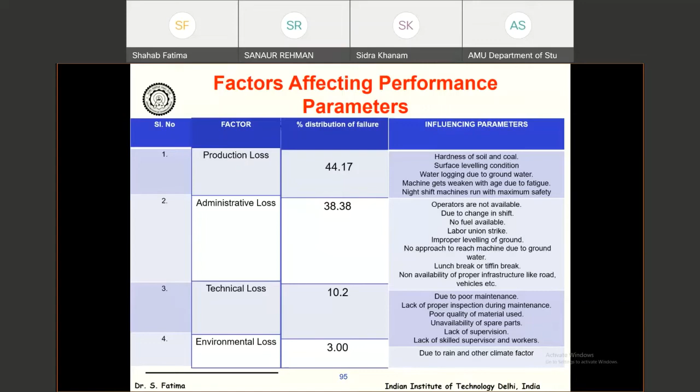So in that kind of scenario, if without performing FMEA or FTA or any root cause analysis we go ahead and perform maintenance, we are actually going to add cost which is not required, because here the loss is not because of technical or maintenance issues. Here the loss is because of some other reason. That is why I must tell you why FMEA, FTA, root cause analysis, proactive maintenance, and RCM are important to us.

Now I am moving back again to condition monitoring. I want to tell you what are the emerging trends in condition monitoring. You all know the techniques of condition monitoring, you have learned different techniques of condition monitoring also, and you know the different maintenance techniques: preventive maintenance, predictive maintenance, breakdown maintenance, and condition-based maintenance. You know RCM also, and when to perform maintenance.

But now the challenge in maintenance is this: we all know that a rotating machine is not composed of one bearing or two bearings. In industry, if we talk about a big plant like a cement plant, thermal power plant, a gas turbine used to power a frigate, or a railway engine, there are a number of components. If you are going to perform predictive maintenance, you have to mount sensors at different locations. Even if you are able to mount sensors and acquire signals from them, how are you going to manage that data?

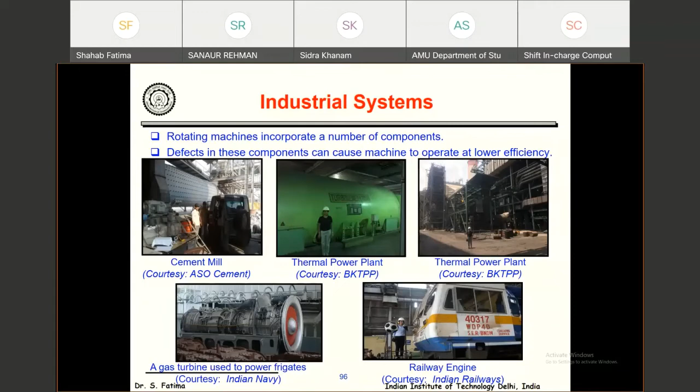So the main problem nowadays is managing the data. We have done lots of advancement in sensing also, but how to manage that data, because the data is on the cloud and you have to look into the data and do the analysis. If you look into heavy equipment, there are a number of components, so managing the data is a very big challenge because those machines are at very remote locations. And who is going to perform the vibration analysis? Who is going to look into the thermal imaging? Who is going to look into the oil monitoring? Those are the major challenges.

So for that, the proposed system is to use a state-of-the-art technique known as machine learning or artificial intelligence approach, combined with some statistical technique. With that, we are able to reduce to an optimized data set, and it will also use less memory, enable quick decision making, through soft computing techniques.

So basically, integrate the traditional approach with some advanced approach known as machine learning, cloud computing, IoT, and find out a smart, intelligent, automated fault diagnosis system. To develop a smart, intelligent, automated fault diagnosis system.

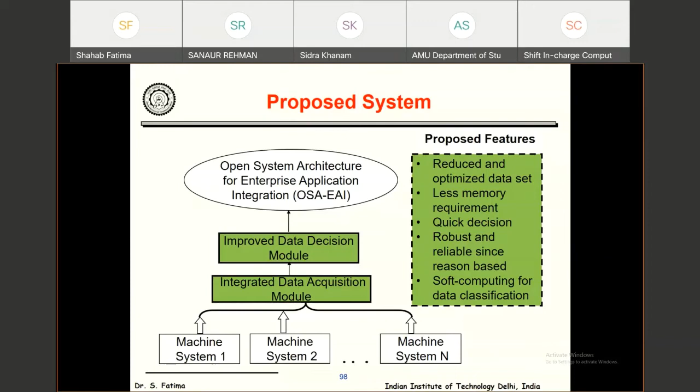Because nobody wants to stand with the machine nowadays, people have to perform from a very remote location. So can we develop those kinds of systems which can automatically monitor the system condition?

The fault detection strategy should be composed of some traditional techniques, that is vibration monitoring, temperature monitoring, current monitoring, and some state-of-the-art techniques using fault classification based on artificial intelligence, or some statistical technique based on principal component analysis, or so on.

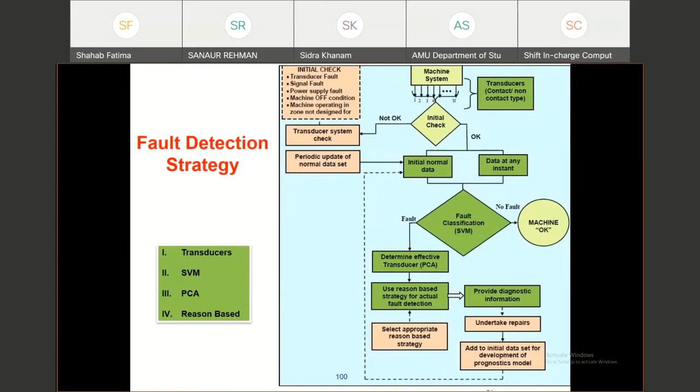So here, if we have a small system like this, a machine fault simulator, we can introduce the system with different fault conditions because that is in our control. If we develop a system at a very small stage, at the laboratory level, can we implement the same strategy at the advanced level, that is at the industry level? Yes, we can do that.

So we have to develop those kinds of systems which we can develop at the laboratory level and implement at the industry level also. This particular system can be introduced with different bearing defects, misalignment, shaft defect, gear defect, eccentric rotor, different types of coupling, different types of unbalance. So we develop the system by introducing it with different fault conditions.

Once we introduce the system with different fault conditions, we mount a number of accelerometers also. Ultimately the idea is to reduce the data handling part. So initially we mount a number of transducers, and then we try to find out how to reduce the number of transducers also.

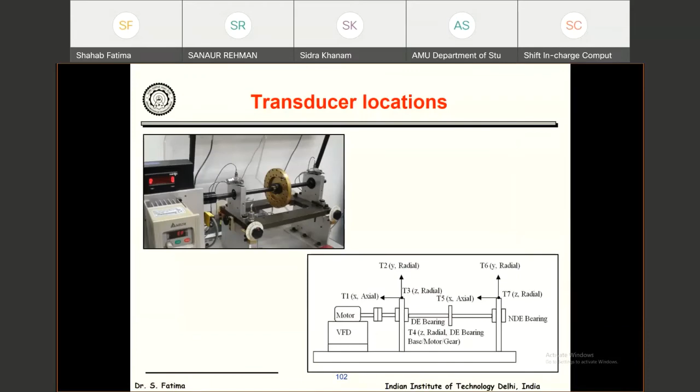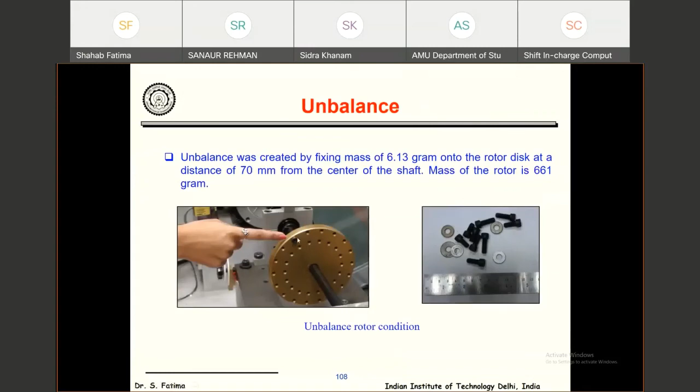Rotor unbalance we have introduced in the system, by adding mass to the system. Next is we have eccentric rotor also - one is normal rotor, one is eccentric rotor.

Next, in the system we introduce a system with cracked shaft. By opening and closing of the bolt, we can introduce the severity of the crack to the system.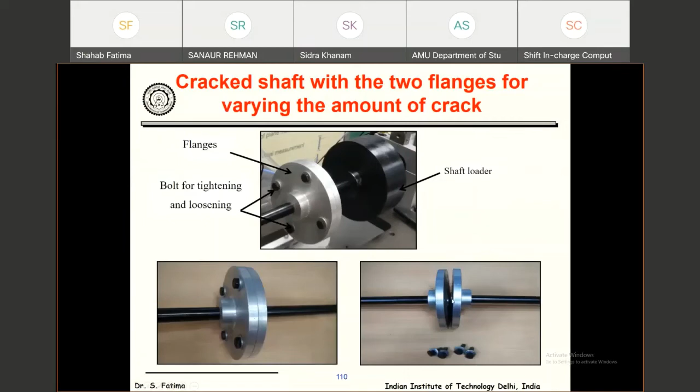Bearing, we have defected bearings - one is inner race defect bearing, outer race defect bearing, ball defect bearing. So we have different defected bearings, and we have a defected gearbox also.

And this is the reason-based technique we have developed. In normal condition, we can do this kind of vibration analysis where we can look into the characteristic frequency, 1x, 2x, harmonics of those things, and find out the fault. But I'm not talking about the basic vibration-based technique.

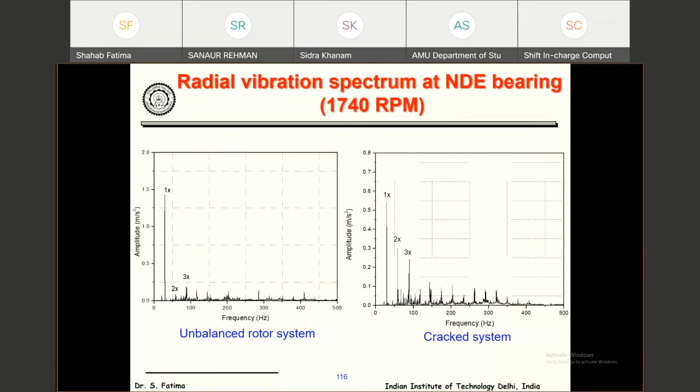I'm talking about an automated system where we don't require any kind of person to look into the characteristic frequency. We want the system itself to classify the fault and find out what kind of fault is there in the system.

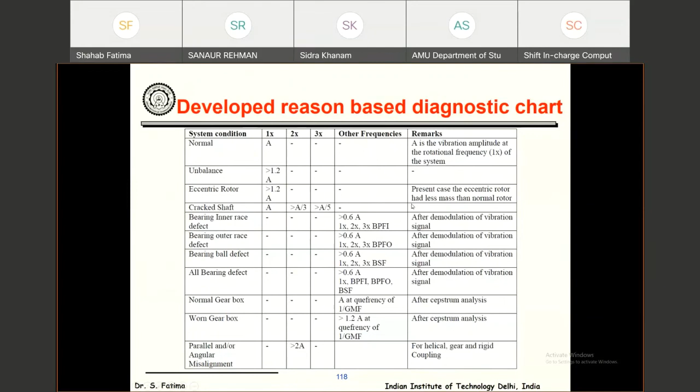So by introducing the system with different kinds of fault conditions, we have developed some reason-based fault diagnostic chart that is actually based on vibration analysis. By putting load to the system, running the system with different frequencies also, we are able to develop this kind of traditional approach-based vibration-based severity chart.

And then here we have also performed temperature monitoring, because in a system, sometimes we are not able to perform contact type of measurement. So we can also acquire the data by non-contact type of measurement. Here also we have a laser-based vibration monitoring system, a laser vibrometer, where at a distance we can find out the vibration of the system.

So my idea is not about the instrumentation here. You can use any type of instrumentation, contact type or non-contact type. I want to tell you that once you have acquired the data from any sensor, whether it is temperature monitoring, motor current monitoring, or any kind of sensor...

Once you acquire the data, what you can do is - say it's a misaligned system - you can check the data at any instance to see if it's a normal condition. If there is any fault, we are able to classify the fault by using a support vector machine, or nowadays you can use any different types of fault classification techniques.

If the machine is okay, you can perform the statistical analysis and find out the effective transducer, because initially we mount a number of transducers, that is contact type of transducer, non-contact type of transducer. But here we want to reduce the coherent transducer, incoherent transducer, and we want to reduce the number of transducers also. So by using the statistical technique, principal component analysis, we can reduce the incoherent transducer.

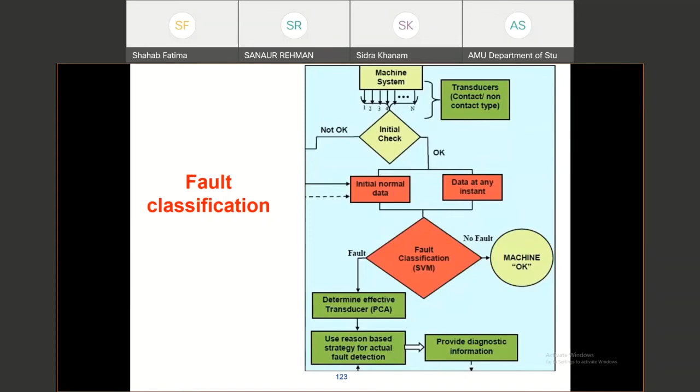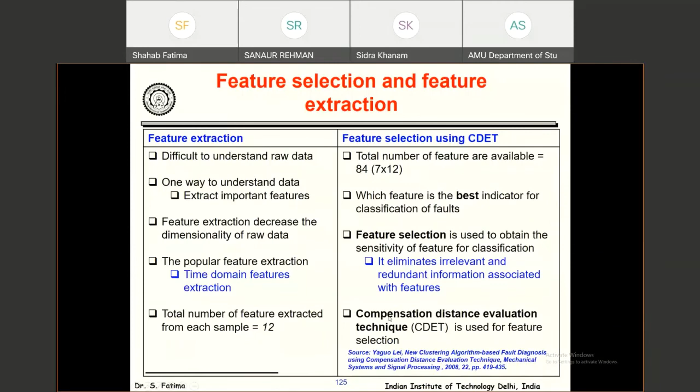Again, once you are able to reduce the number of transducers, you can perform the reason-based strategy for actual fault detection. So for the feature extraction, we have used principal component analysis. Yes, compensation distance evaluation techniques are used for feature selection also. And again, based on that statistical way, as well as using the machine learning approach that is known as SVM, we are able to classify the fault.

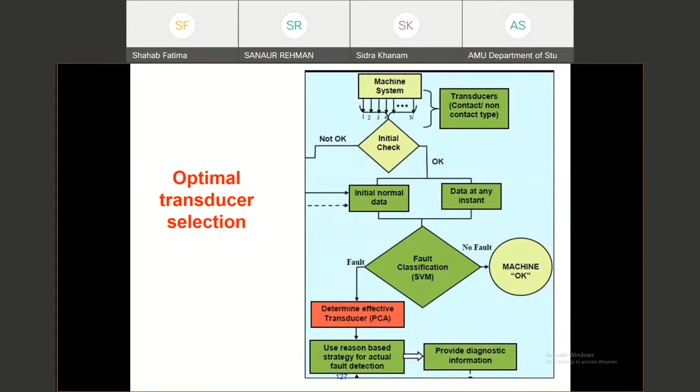So this is one particular case study I published long back in 2014. But nowadays there are a number of ways. Number of fault classification techniques are available. Number of feature selection techniques are available. You can use the advancement of the machine learning technique in the condition monitoring approach to develop an automated fault diagnosis system. So this is how we have done that part. I'm skipping that. I'm just showing you the application of machine learning.

So machine learning has proved to be a very powerful tool to manage the huge fault data efficiently to diagnose the failure in rotary machines. Deep learning is also being used by people for development of fault diagnostic systems. Deep learning is a rapid improvement of machine learning algorithms, which plays as an efficient way for overcoming these limitations of machine learning. Nowadays, transfer learning is a research problem.

As I told you, suppose I have developed some sort of fault classification techniques at the laboratory level. I have done some sort of fault identification technique on a machine fault simulator at the laboratory. But can the similar approach be used for an industrial system? So for that, transfer learning is a challenge we are facing right now. It is actually a research problem in machine learning that focuses on storing knowledge gained while solving one problem at the laboratory level and applying it to a different but related problem at a bigger level.

So the major challenge we are facing now in condition monitoring, or the major future of condition monitoring, is to use machine learning for development of automated fault diagnostic systems. So if you look into vibration monitoring also, we have a test bearing, we can acquire the data, we have raw data. Here in raw data, as I told you, sometimes the time domain feature is not able to give a clear picture about the fault.

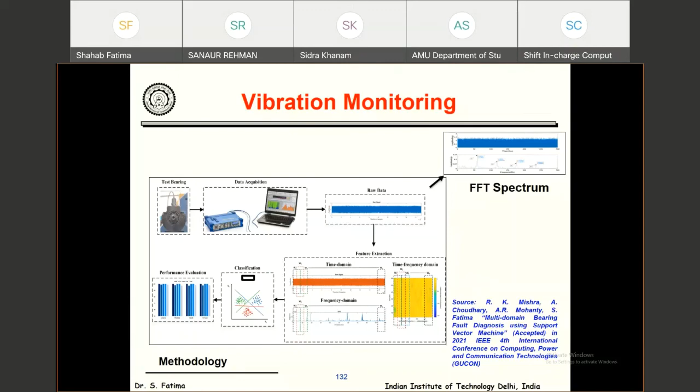So here in machine learning, you can use that time domain feature without converting it into frequency domain. That is also a way you can use the machine learning approach. You can only train the time domain data and classify the fault. You can train the frequency domain data and classify the fault. You can extract the time frequency domain feature and classify the fault. So there are various methods now opened up because of advancement in machine learning.

And in vibration monitoring, we can do it by using machine learning. Here we have extracted the time domain features, and based on that, we are able to do multi-domain bearing fault diagnosis using support vector machine. Next, the technique can be vibration monitoring. It could be motor current signature analysis. It can be a thermal imaging camera. A similar approach can also be used with motor current signature analysis.

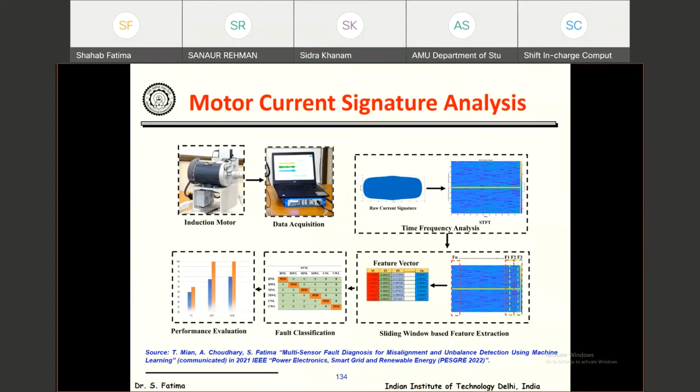We can extract the feature vector, we can train. Here we have different fault classification techniques also, and performance evaluation. So we can apply machine learning to motor current signature analysis also. See, this is a sensor, a Hall effect sensor, for acquiring the current signature.

So here, motor current signature analysis can also be used for multi-sensor fault diagnosis for misalignment and unbalance detection using machine learning. Here we are fusing two different types of data: one is vibration data, one is current data. And to increase the reliability of the system, because one data shows a certain classification rate and the second data shows a certain classification rate, once we fuse both the data together, we can develop a more reliable system.

Here we have used the deep learning approach where we can use the image, not the data. With the image, we are pre-processing those images, finding out different patterns, and based on that, we have done the feature extraction of those images. With that feature extraction, we have performed principal component analysis, feature reduction techniques, and then fault classification.

So I'm showing you the source also. If you want to look into the detail, you can look into how we use infrared thermography, motor current signature analysis or vibration technique, and how we fuse it with machine learning and what we actually get.

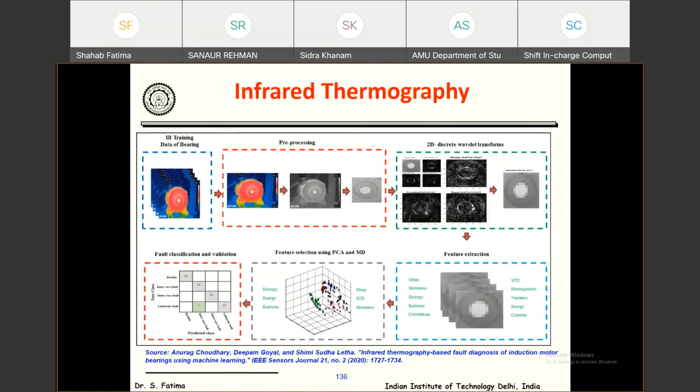So here also we have used infrared thermography, looking into convolutional neural network based bearing fault diagnosis of rotating machines using thermal imaging. So here we extract the images, pre-process those images, do feature extraction, feature selection, applying artificial neural network, CNN, ANN, SVM. So like this, we can also do the condition monitoring.

So this is, I guess, the last slide of my presentation. Here we are also trying to use this intelligent mannequin, or you can say sound quality parameters, to diagnose the fault. Because if we have a fan bearing failure, by listening to the sound of the bearing, people can tell there is a lack of lubrication or the bearing has some sort of problem. So by hearing also, people can make some sense about the fault.

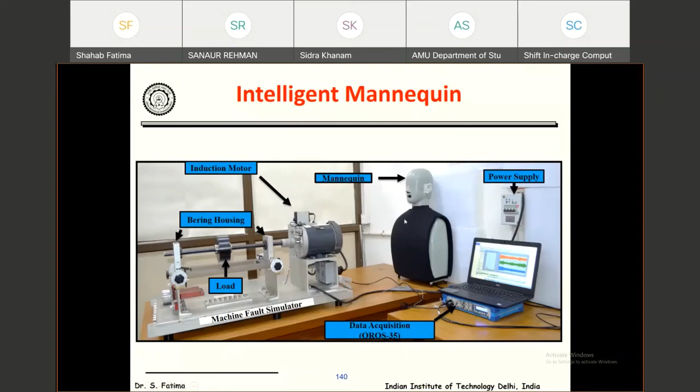So looking into the harshness of the sound, the tonality, the roughness, the prominence ratio, people can tell what kind of fault is there in the system, whether it is on the bearing side, on the gearbox side, or inside the motor. Okay, so we have to train the system by using this intelligent mannequin or machine learning approach also.

Here also research is going on in multi-sensor fusion, where we are fusing two different sensors and trying to develop a more reliable system. Vibration and thermography based sensors are used and multi-sensor fusion is adopted for enhanced reliability. Multi-sensor fault diagnosis for misalignment and unbalance detection using machine learning. So this is also a way of sensor fusion. So fuse the data, pre-process the data, feature extraction of both the data, feature fusion and feature selection, then fault classification.

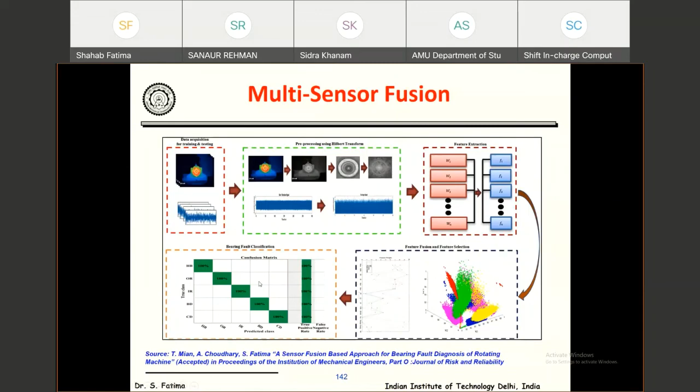Now the important thing is Internet of Things, that is IoT based support. Suppose the system is at a very remote location. If at the place we are able to reduce the data by applying some statistical or machine learning technique, we can send only the relevant features to the cloud, acquire them from the cloud at the office, and find out the fault in the system. So it is an accurate measurement. Measurements are prone to error.

So on your mobile phone, if you are not at the industry or not available at the plant, you still get a notification. We are trying to develop techniques where you get a notification on your mobile phone that your system is going to fail. A similar kind of alarm we are trying to develop using signal processing as well as machine learning, and the approach of Internet of Things, so that we can have all the information on the mobile. So this is the application of Internet of Things to condition monitoring.

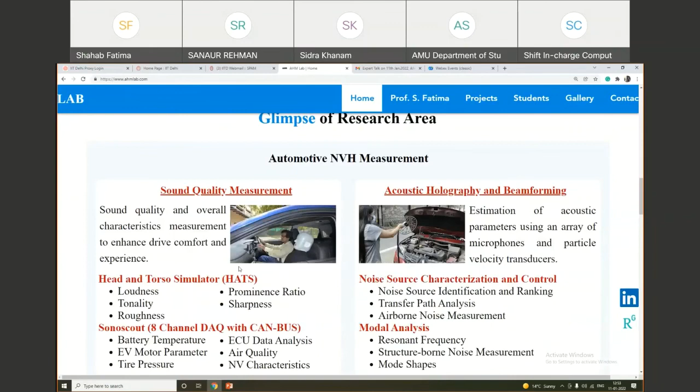Thank you, ma'am. So if you want to know more about the things, you can look into my web page also. This is AHM, Automotive Health Monitoring Lab at IIT Delhi. This is the recently inaugurated lab by our director, sir. You can look into the research we are doing in terms of condition monitoring and NVH. We have different setups also. You can look into the equipment also. So this is AHM Lab, Automotive Health Monitoring Lab at Center for Automotive Research and Tribology, IIT Delhi.

Yes, please. Hello. Yeah. Hello. I'm audible. Hello. Yes, Dr. Fatima. Yeah, I'm audible. Yes, you're audible. Yes, you may please continue. Any questions from the panel side? From student side, any questions? Hello. Yes, please. Hello, I'm not able to hear anything. Yes, Dr. Sudhir, can I say something? Yes, please. I'm listening. Okay.